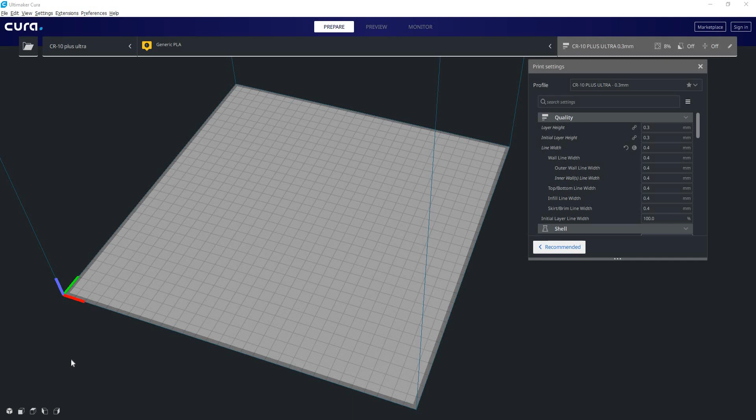So we have Cura open here. I'm going to load up a model. We got our Benchy here. So say we went through our settings here, we're going to set these to default, and we're going to get ready to print, and we'll slice it.

And now that it's sliced, normally our file would be ready to print. But how do we know what it's actually going to make? We haven't received any form of confirmation our print's going to be correct. So that's what we're going to check now. We can either hit the preview button after we've sliced our part, or we can hit the preview button up here.

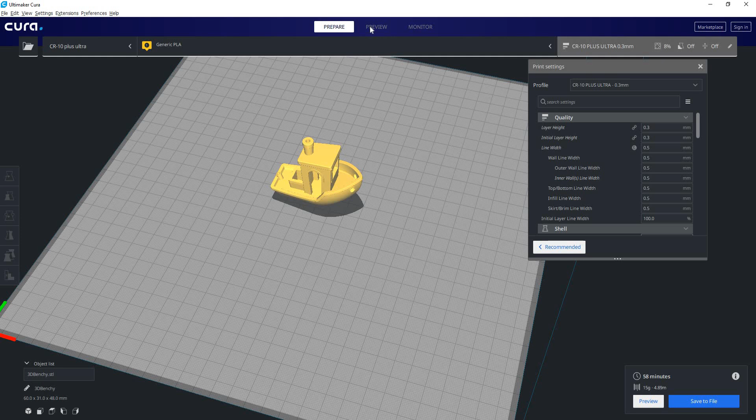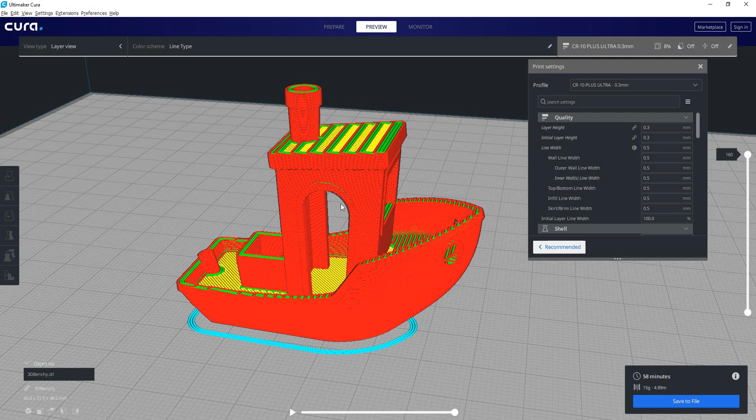And now it's going to take us into the visualizer for the G-code. So here we can see our model. Although this isn't actually the 3D model, this is our 3D model. This is a visualization of the G-code that was generated for your print. So this is truly what your printer is going to make. So we need to verify that it looks correct.

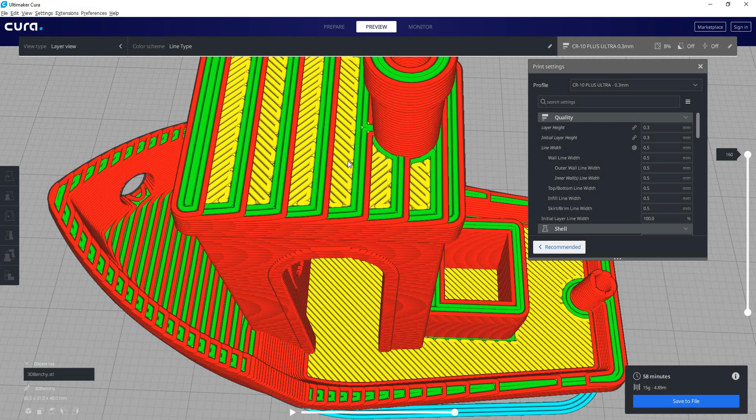So the first thing we're going to do is take a look at it from all sides. Make sure it looks good. We can zoom in real close, we can see the individual tool paths, all the individual lines it's going to make. Look at it upside down, we can see the ceiling inside there. We got the windows and the doors and the portholes. You want to get a really good view so you can analyze all these features.

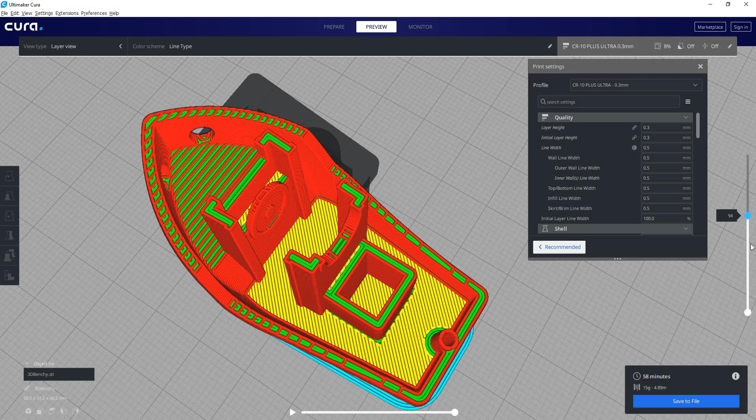Then we'll find a nice view where it's totally in our camera. And we'll grab this vertical slider here, and we can actually cut through the part. And now we can see our infill structure generating here. This is where we can check all the settings and what they're actually going to do. We can also go up from the bottom and look underneath if we need to.

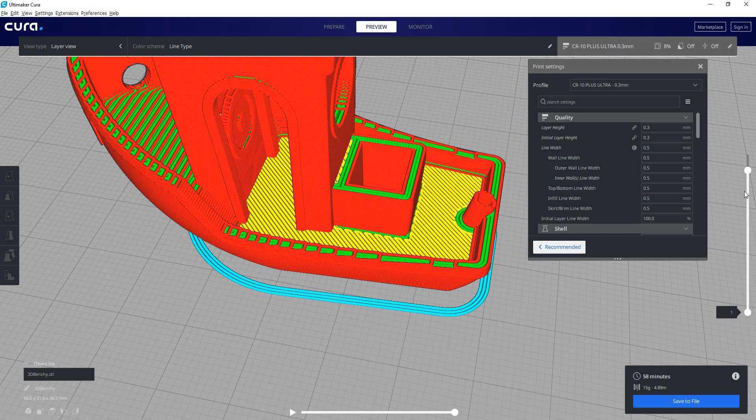The most important thing to look at though is your very first layer. This is the layer that adheres to the build plate, so we want it to be correct. So we have different colors here. You can change your view type by clicking on color scheme. Normally it's going to be a material color, so it might be yellow, which is not very good. It all looks the same. It's hard to define it.

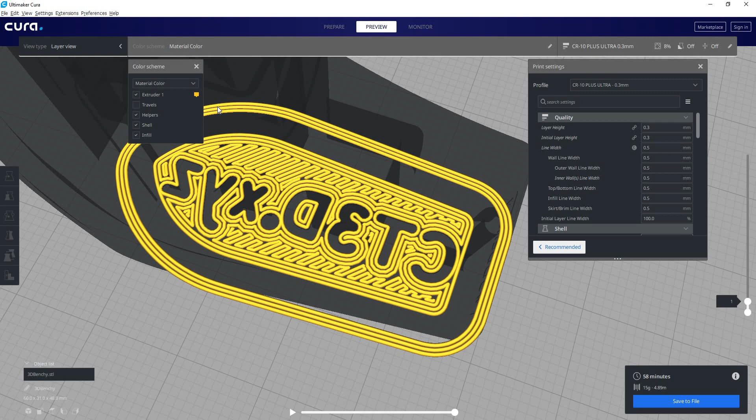You generally want to use line type, so the colors correspond to the feature type. So you can see red is our outer wall, green is our inner wall. So if we go to our shell, we can see we have 3 walls, meaning 2 inner walls and 1 outer wall.

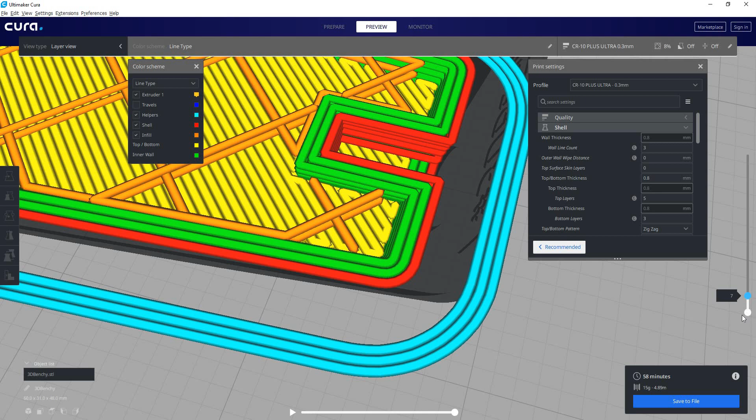We can see yellow is our skin layers. So we got a few solid layers there before our infill starts, and we got some top layers there as well. We want to make sure there's a good surface area here.

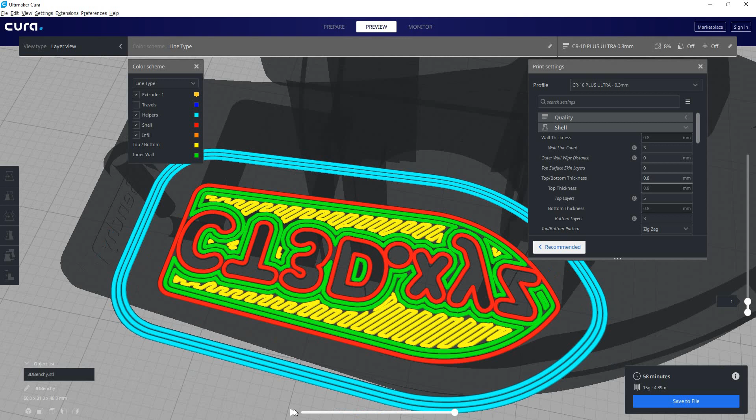We also have a play button at the bottom, and we can watch it actually line by line draw out our part. This is good if we're trying to adjust our tool paths. And we can drag the slider to speed it up and scrub through it.

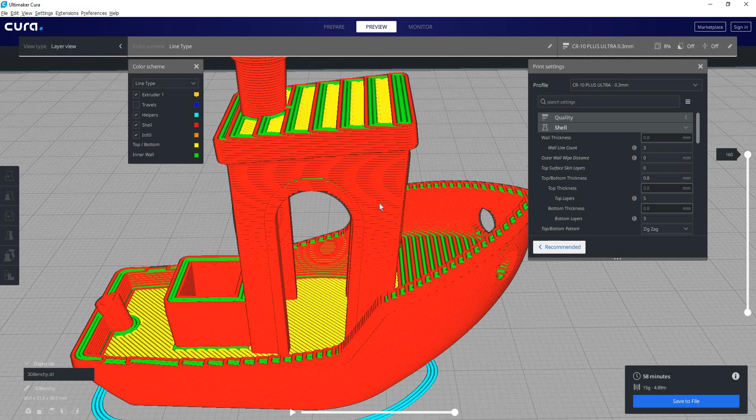It's very important to analyze these and make sure this looks correct. There could be errors in the model that you can't see, but Cura can see it, that can ruin the way the G-code's generated. And instead of printing the part only to find out it failed halfway through because of that, you can detect it here and potentially fix it.

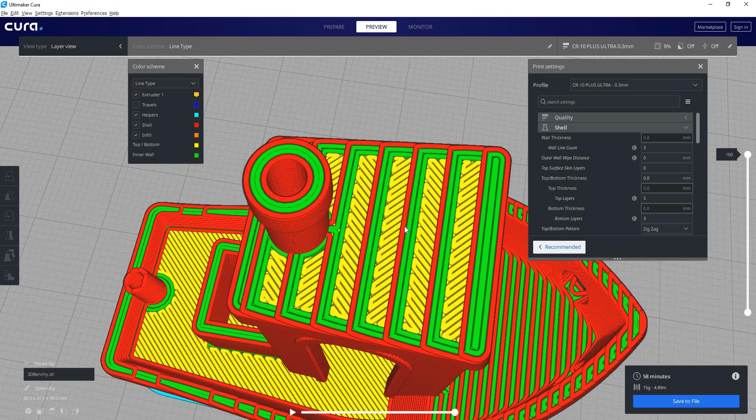So there's a few things we can check here. First of all, we can see that there is a void here in this chimney. And the reason that void is there is because our line width is set to 0.5 millimeters, which does not divide into whatever the dimension of the thickness of this is. But we can adjust that.

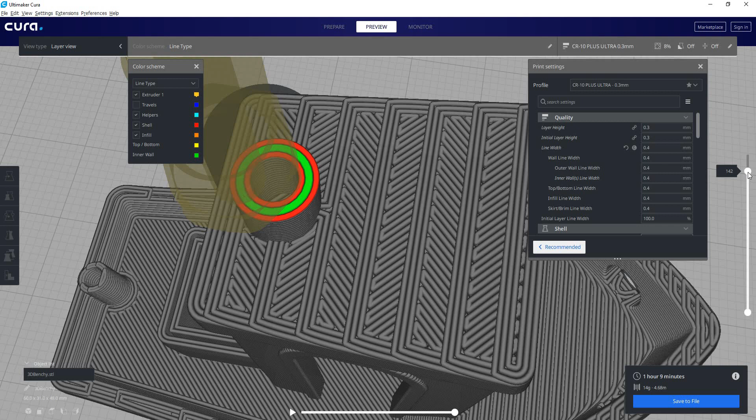So if instead of a 0.5 mil line width, we use a 0.4, now anytime we change a setting, it's going to wipe the G-code, which is why it disappeared, but we just resliced it, now it's back. Now we can see with the 0.4 mil line width it'll fit in there.

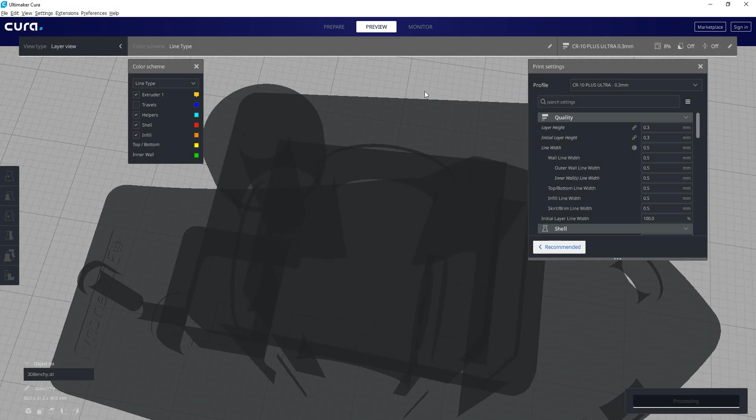Then we go up to this chimney, the chimney top, and now there's a void in the chimney top as well. But if we go back to a 0.5, now we can see it's filled in the top, but the void's in the bottom.

So we want to analyze all the different features of this to see how it's going to print. Here we can see that this box liner looks like it's going to print nice and solid.

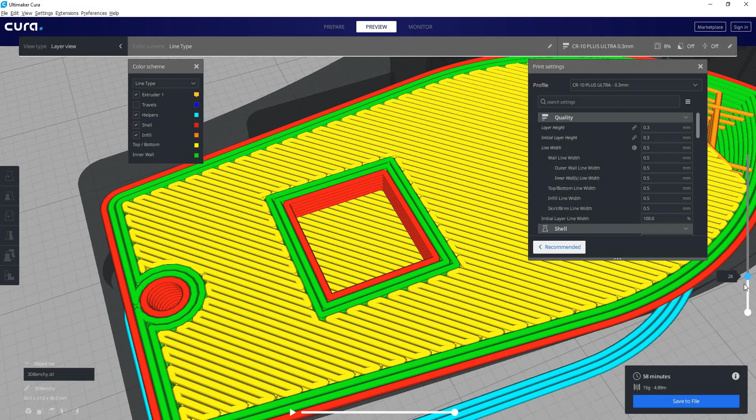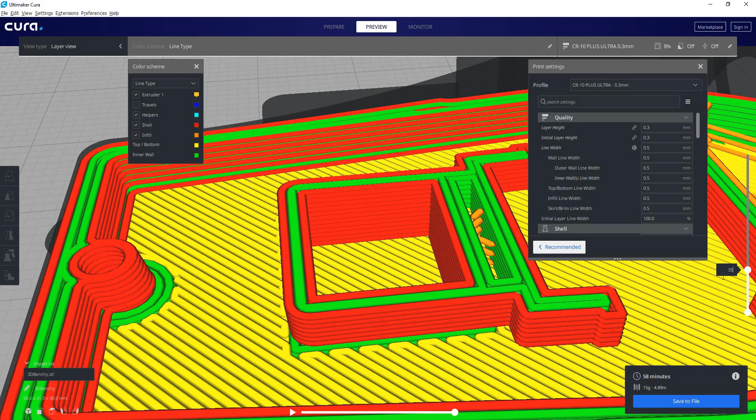We can see at first here though, there's no inner walls on that layer. If I click on my layer here, I can use my arrow keys to go up layer by layer very precisely, and watch how it slowly widens and more lines are put in. We can see there's 2 inner walls there. And as we go down, it squishes into one before there's a few layers where there's no inner walls at all, which would affect the integrity of our part if that were a concern.

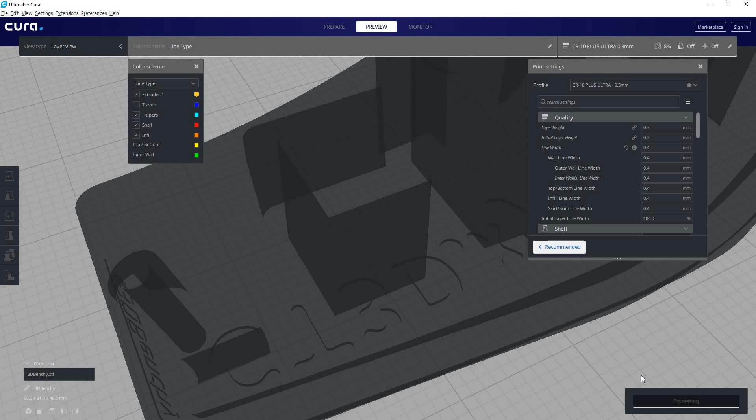But if we go to a 0.4, now we can see that very first layer of that box liner has 2 walls. And as it widens up, a gap forms in there, and another line can't be placed because that gap isn't wide enough to fit whatever line width you've adjusted it to here.

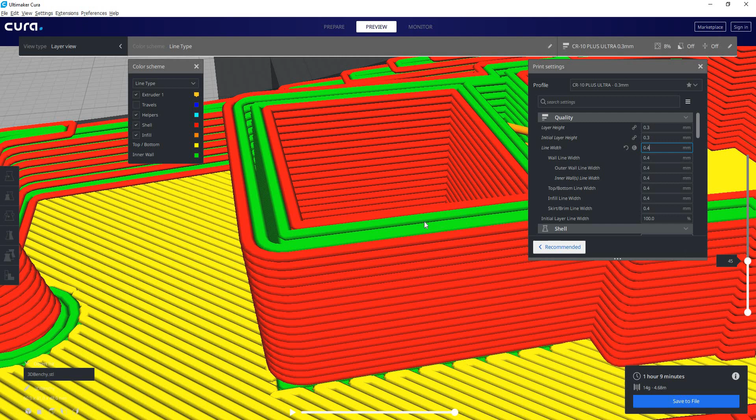So if we changed our infill, we could see exactly what that effect is going to do. It makes it very easy to check your settings. If you're unsure what a setting does, you can change it and then look at this view. Let's try 30% infill.

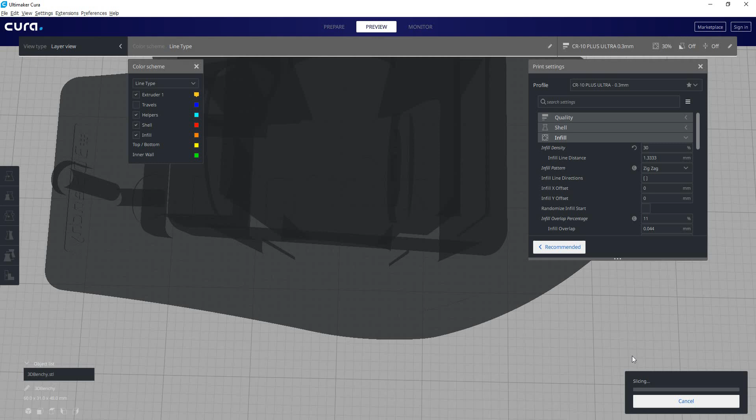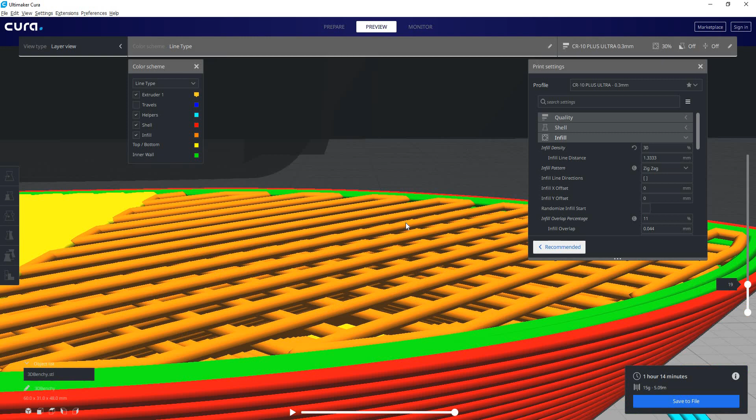There, now we can see how high that density has become. If we zoom in real close, we can also see that it's actually doing one path per layer rather than both on the same layer, which is why the grid looks so dense compared to what it's actually set to. We can see all those voids there, because we're using a zigzag infill pattern.

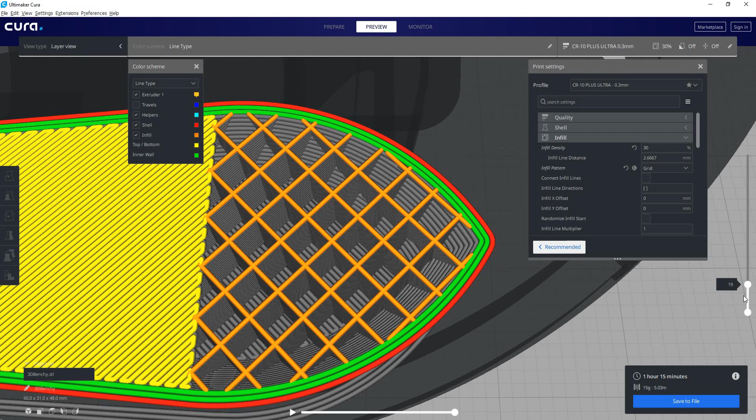We could switch to grid, and now we'll be able to see the exact difference it's made. There we go, so now it looks much less dense. But if we look down and zoom in, we can see it's going both directions on each layer, so those are effectively solid walls all the way up.

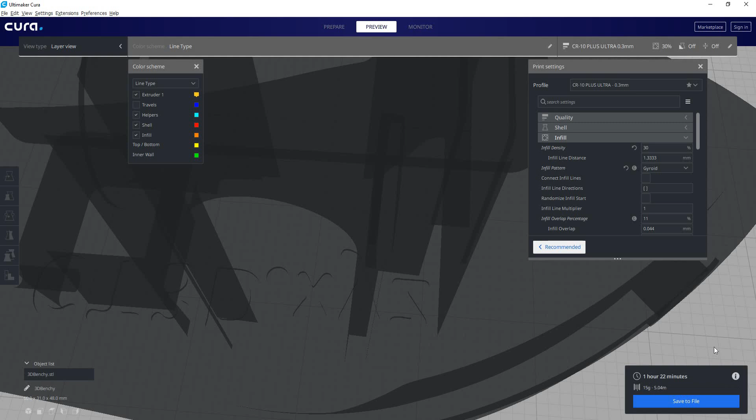You can see there's a wide range of patterns here, so you can try all of them to see what kind of effects you have. We can turn on the gyroid, which is one of their newer infill patterns. You can see how intense that is.

We can also check our layer height, because if we look at this from the side, we can see right here this looks very steppy and coarse, because we have a 0.3 mil layer height. If we were to use, say, 0.1, we can visually see the difference that will give us.

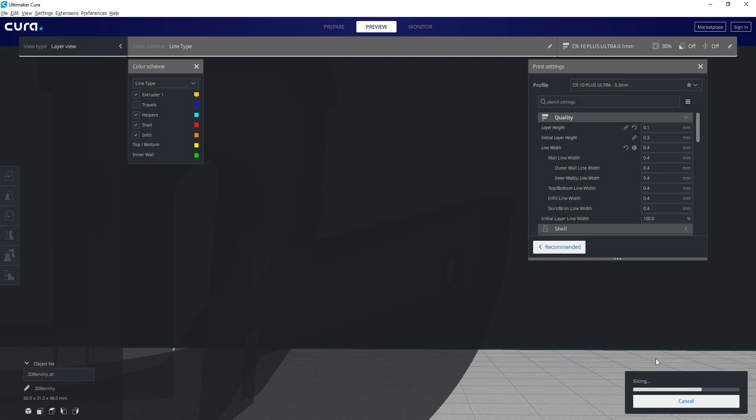There, now that looks much smoother. And we can check all this before actually doing any print. We can see the ceiling looks much smoother as well. But of course our print time has drastically increased.

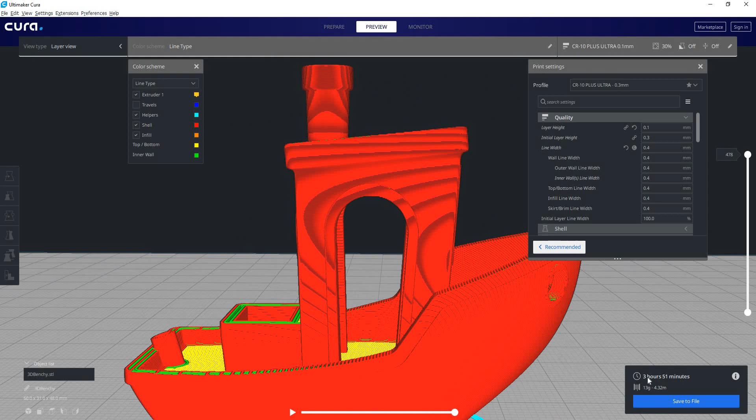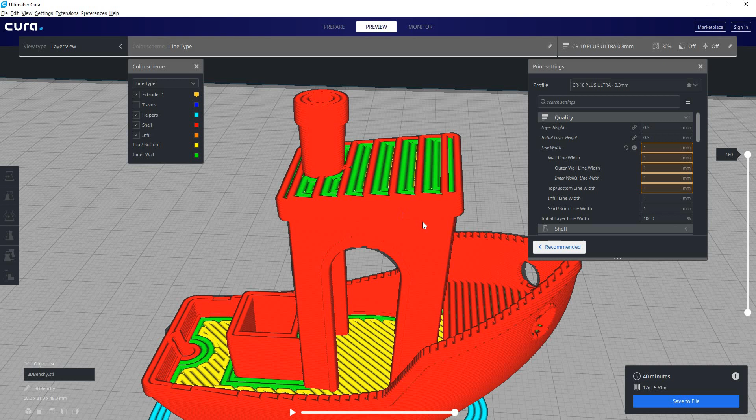You could also set your line width to 1 mm if you're using a big nozzle. Now we'll see some real issues appear, because this model is too small to effectively print well with a 1 mm line width in general.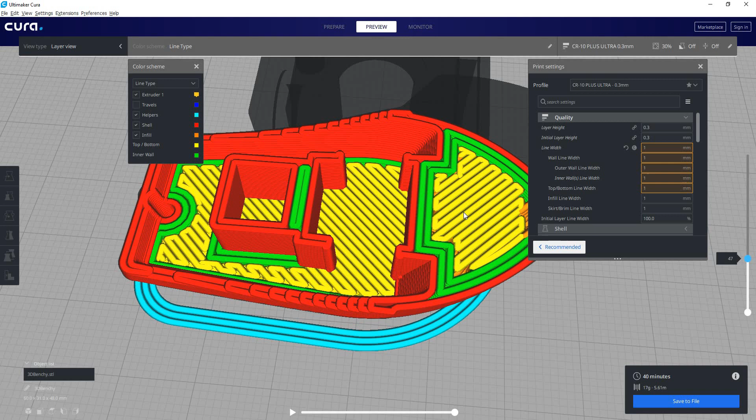So cutting through it, we can see that most of the walls appear to be close enough together that they'll bond properly, especially down here. You can see how it separates, and it's bound really close together as it pulls up. So actually this looks like it should print all right with these settings.

You can see here that these walls are totally solid. There's a couple little gaps, right there, right there. That's not a big deal. But as long as these walls are touching, we know this is going to be good.

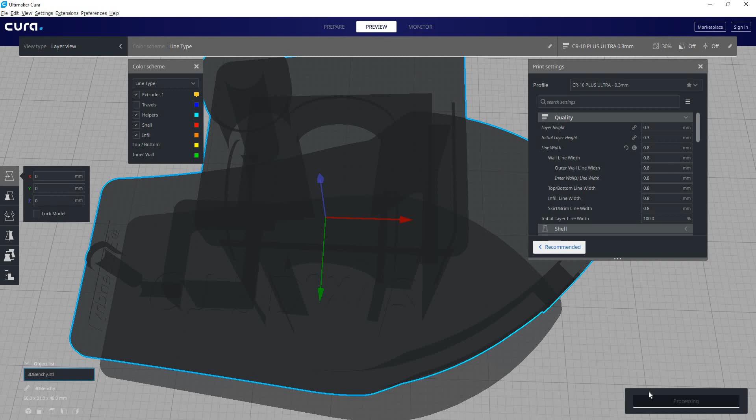If I set this to 0.8 instead, we might see a gap form between those walls, and that's what we don't want. That's what we're looking for - we want to find those problem areas and resolve them, because now this is going to be very weak and fragile. None of these are connected together.

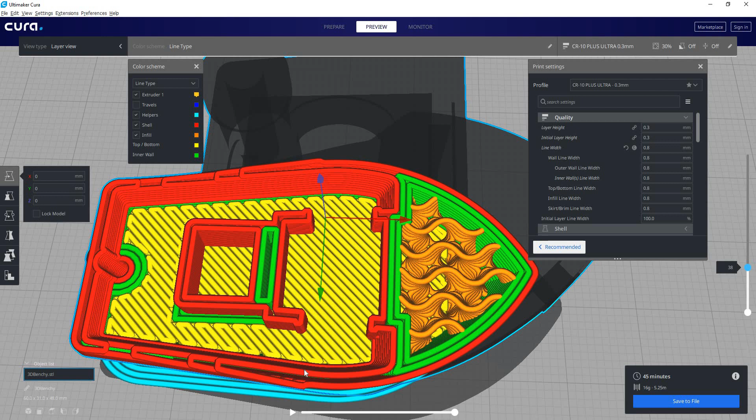Same with these walls here on the front of the boat - you can see there's gaps there. All along the side here we have these big gaps, and that's going to ruin the integrity and strength of our print. So by visualizing this layer view, we can find and correct all these issues.

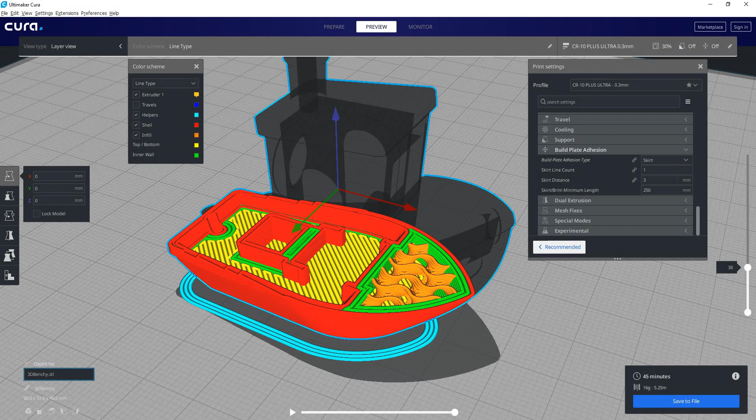And all of these settings here have some effect on this, so it's very easy to figure things out if you're not sure what it does. Like on build plate adhesion, we got our skirt turned on, which is this light blue line. I could set that to a brim and slice it and see what that does instead.

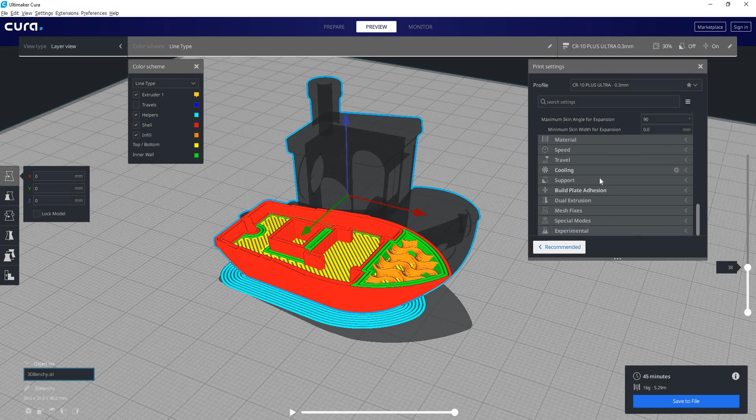So now we can see our skirt has changed to a brim connecting all the way to the part. We can look at it and confirm that's what it's going to do. We can also visualize our support and how it's going to generate just by enabling it.

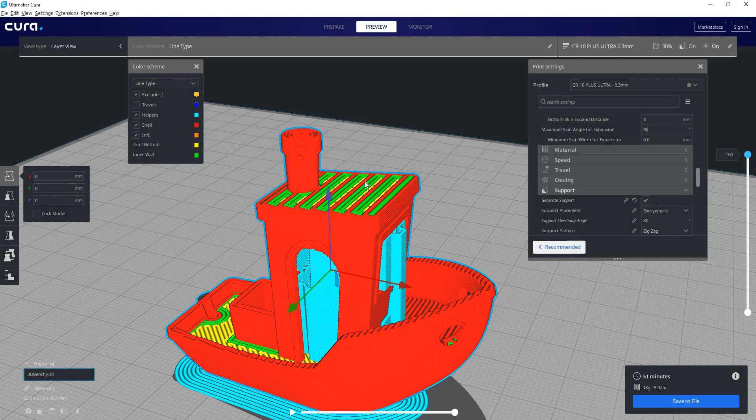We'll just let Cura slice that quickly. Now we can see it's generating support inside the cabin of the benchy.

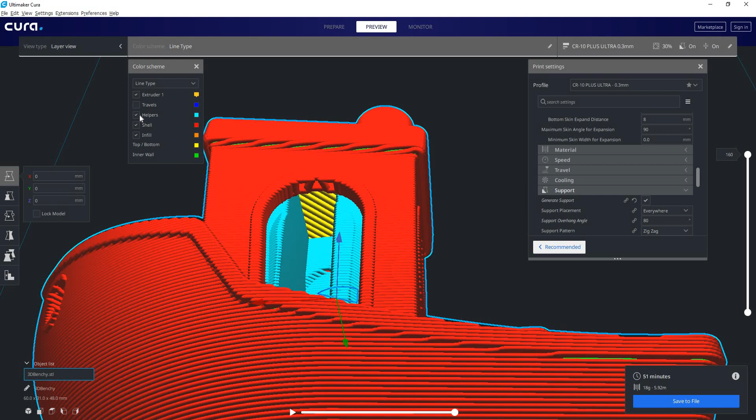You can see it's trying to support that roof there, although it doesn't actually need this support material, and that's important to note. You need to decide what parts need support and what don't, even though you might think this does, because there's nothing under there. It's such a small area, it's considered a bridge. It's a straight line connected on both sides, so it should print fine.

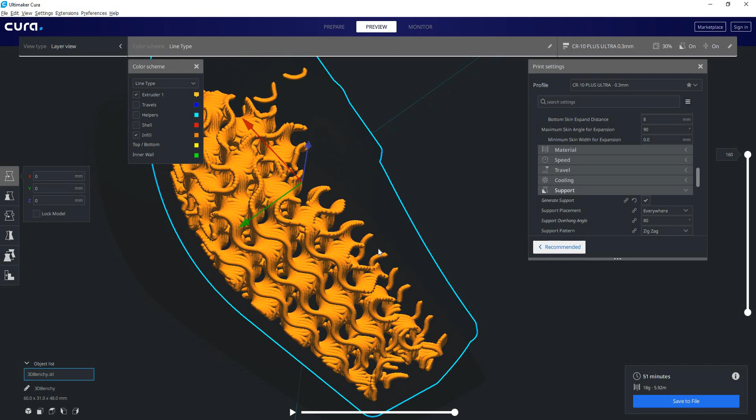You can also click on these buttons here to help us see and visualize things better. So I'll turn the walls off, I'll turn the support off. So now we're only looking at the infill being generated in this part. There's not a lot of infill in there. Really, if we wanted to optimize, we could remove this little bit of infill up here because it's just unnecessary.

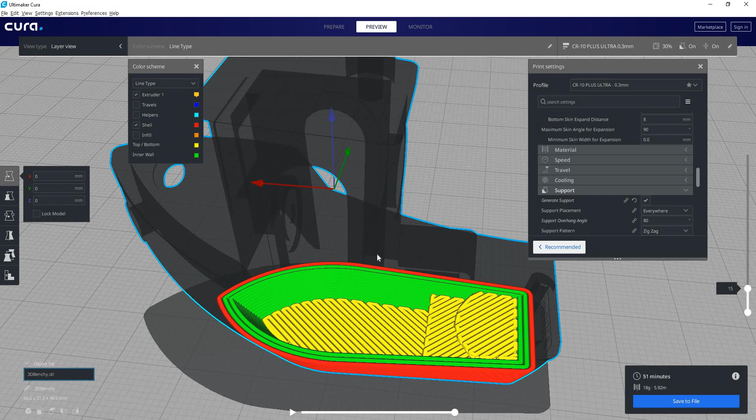Or if we want to see a void here, we can turn our infill off, and now it looks like a void. It's important to remember that you've done this, though, so you don't think that a setting is wrong when you've just hidden the ability to see it.

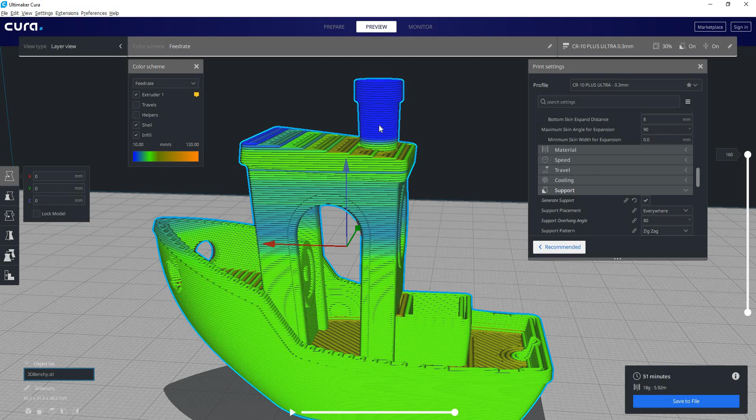There are other ways you can visualize your part. We can visualize it via Feedrate. So now the colors correspond to the speed it is printing that feature at. Here we can optimize our print time if we wanted, maybe speed up on this chimney because it's slow. Which we wouldn't though, because it's very small and it would heat up. So we want it to print slow, which is why it's blue.

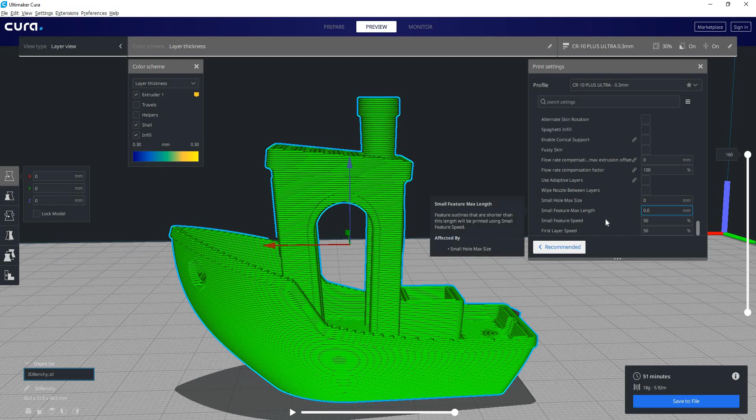You can also visualize it via layer thickness. By default, Cura only uses a single layer height, but we can go all the way to the bottom under experimental here, and we can turn on use adaptive layers. Now it's going to change the layer height based on the angles of features on those layers.

So now the colors correspond to the layer height it's printing these features at. Most of it is blue, going to be 0.2. You can see though there's a few areas here where it's mostly straight, where it's going to print faster. We have a lot of settings here we can use to tweak these values if we need to, but that's a separate video.

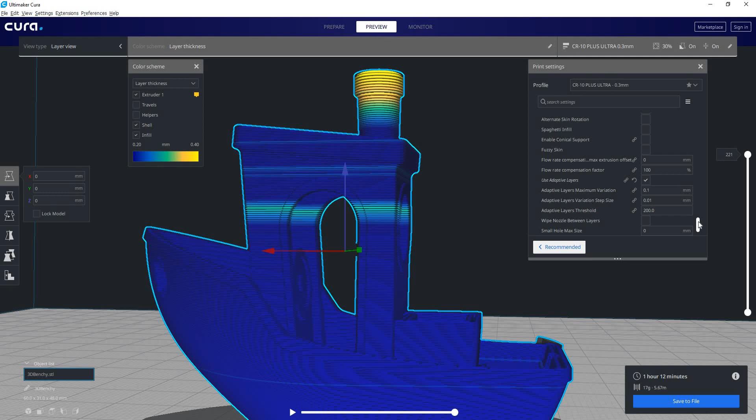Now we're going to set back to our default profile. We'll hit slice. And we'll just check our default settings and see how it looks. We've already gone through everything, so we can give it a quick swipe. We know it's going to print good.

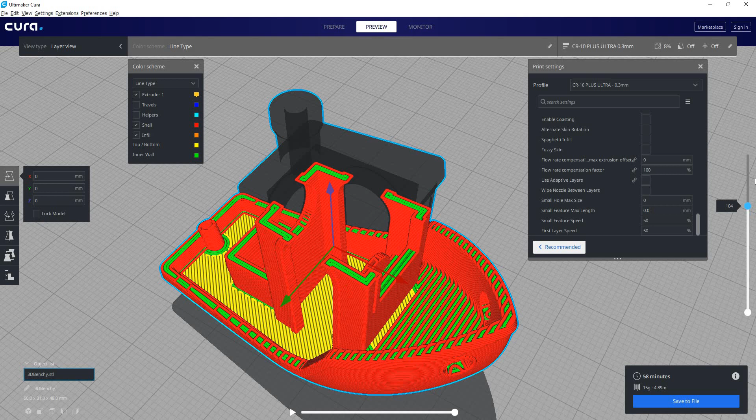The inner walls here, they're all touching. Everything's merged together well. Aside from this little void right in here, we don't have an issue.

If you do need to tweak tight values like that, there's a setting in the shell tab here called horizontal expansion. You can use this to adjust fine tolerances. You can see mine is set to -50 microns. So that means every dimension on the X and Y axis is being reduced by 50 microns to compensate for thermal expansion, stuff like that.

You can do a print and tweak this value to get your tolerances set really tight. So I could tweak this value to try and get material inside this void. Because that void's there, it's too small, so I need to make it bigger. So instead of -50, I'll go +50 microns in size. We should see about a 0.1 millimeter total increase in the void size.

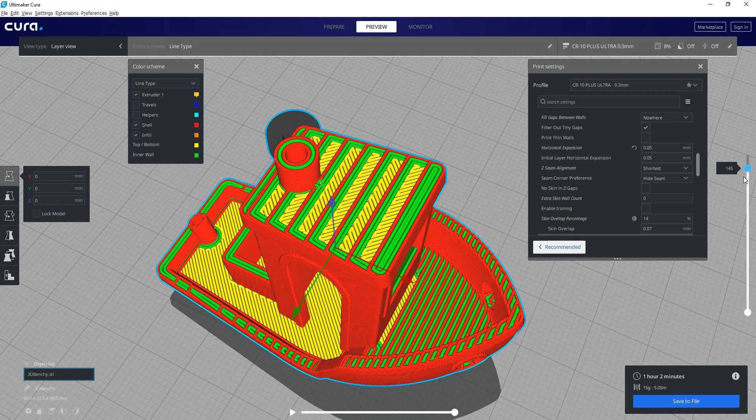Now we can see that it has filled in some of that void anyways. It appears to trickle out there. So we might have to go a little bit bigger to get all the way down. Now we can see that void is completely gone and filled with an inner wall.